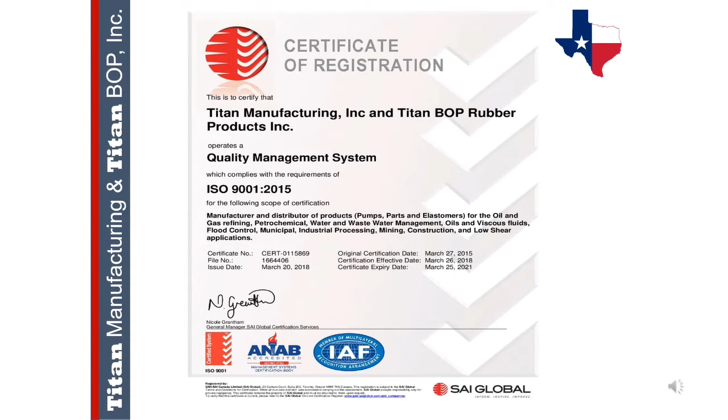This is just a copy of our actual ISO certificate. As you may already know, there are several different ISO certifications, but the one that we hold is the ISO 9001, and that's because it pertains to us. This edition was last updated in 2015, which we are up to date with, as you can see. This certificate is available if any of you were to ever need it for your files, or if you just want to look at a copy of it, or one of your customers wants to see it. It's available, it's here, we've got it, just let us know.

All right, so today's topic is Titan internal gear pumps. For those of you who are not familiar with our gear pumps, these are positive displacement pumps. They are specially designed to handle relatively higher viscosity liquids like fuel oil, resins, polymers, even paints, inks, pigments, and also food products such as corn syrup, chocolate, peanut butter, anything that's highly viscous fluids, these pumps are good for. With our different models and internal adjustments, Titan gear pumps can operate anywhere between 1 centipoise viscosity level up to 1,000,000. These pumps are also equipped with casings that can be positioned to meet common piping configurations, and they have only 2 moving parts that make maintenance much easier.

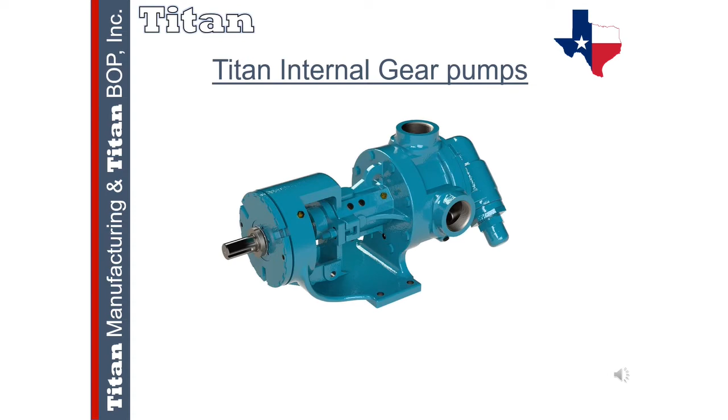Titan internal gear pumps are available in the 4124A and 4195 models. These are functionally and dimensionally identical to the Viking gear pumps. We have sizes available from 1 inch to 6 inches, and we also carry these in NPT and flange connections. Most of the pumps come with cast iron material. However, for some higher viscous applications, sometimes a pump with a cast iron rotor may be prone to gear tooth failure.

In such cases, we have options of making the internals like the rotor and idler in high strength carbon steel. We also have an option of making the complete pump in stainless steel. So it just kind of depends on what your application details are. If the liquid is corrosive to the cast iron, then we would recommend the stainless options. But if you're not sure, feel free to send us your application details, and one of our engineers will look into it and let you know what would be best.

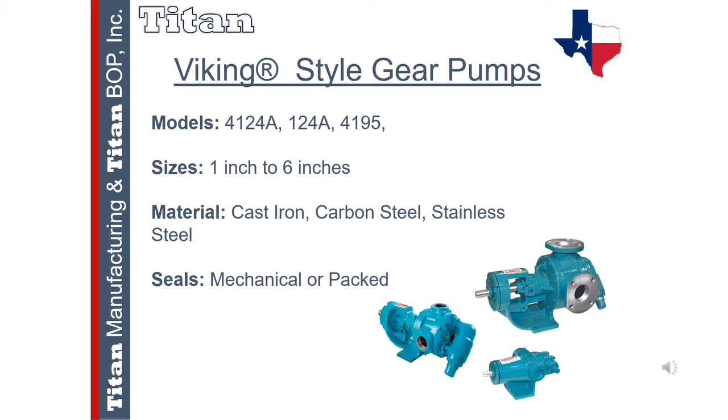Okay, so let's talk a little bit about the different sizes that we offer and our part numbering. As noted earlier, the smallest size is the 1 inch and the biggest is the 6 inch.

You can always go to our website and download the brochure on gear pumps to know more about our available models and sizes. Real quick, I want you to watch a short video. It's coming up on the next slide, showing our smallest pump, the GG 4195. This is just a short little video to show you how it's put together.

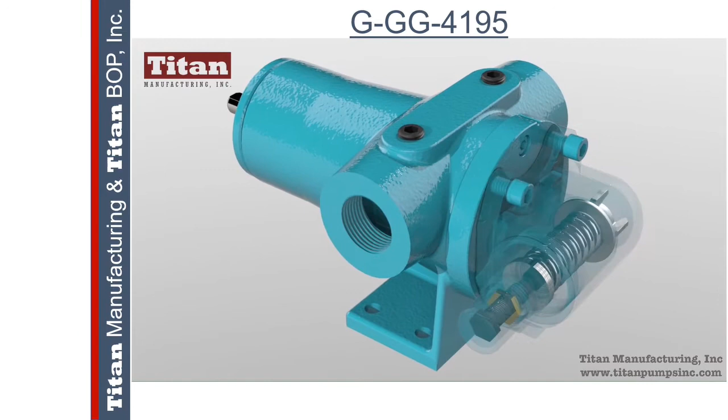These are just some features of our 4124A series pump. All the pumps come with an internal pressure relief valve. This protects the pump from failure due to high pressure. This pressure relief valve can be set up to 200 psi depending on the maximum pressure. Pumps are also equipped with a one-piece cast bracket, which optimizes seal and bearing life.

The rotor clearance can be adjusted for higher viscosities and temperatures. All pumps come with standard clearance for lower viscous fluids, but as you get higher in viscosity level, we need to provide extra clearance. Different sizes have different limits on the viscosity after which you need an extra clearance in the rotor. So it's always better to provide an accurate viscosity of the fluid at the time of the pump selection.

Again, if you aren't familiar with that and you're not sure what you need, please send us your application details and one of our engineers will look into that for you. As explained in an earlier slide, the rotor and idler may need to be converted to high strength carbon steel once we go higher above a certain viscosity level.

Also, the stuffing box accepts packing, numerous component mechanical seals, or a wide variety of cartridge seals. The casing can be rotated in 45-degree increments to allow 8 positions.